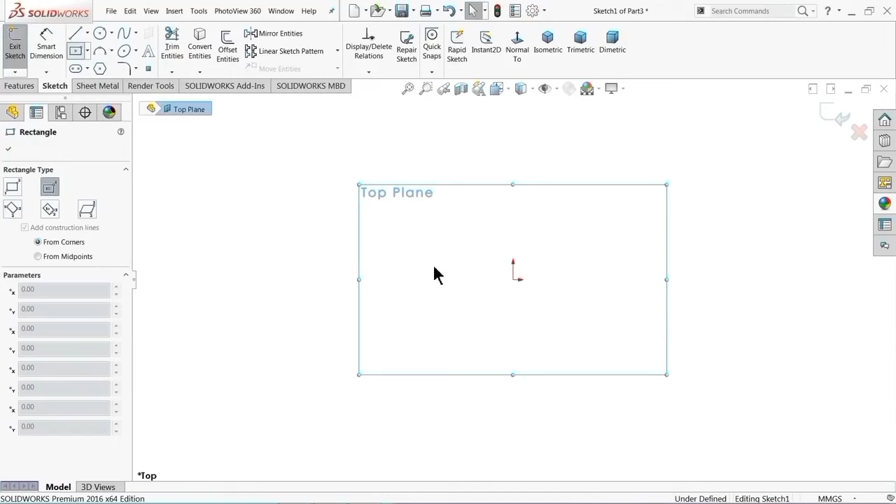Start with the origin point. Right click, select smart dimension.

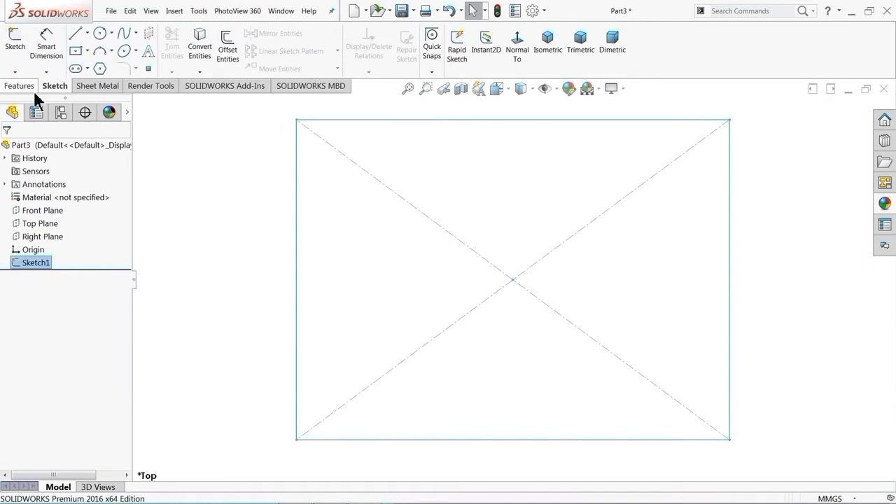Now this upper one is 92 millimeter and this length is 68 millimeter. That's it. Now simply select exit and go to feature and select extruded boss base, and we want to extrude here. Direction 1, keep blind condition 18 millimeter in upward direction. Don't go reverse, let's try upward.

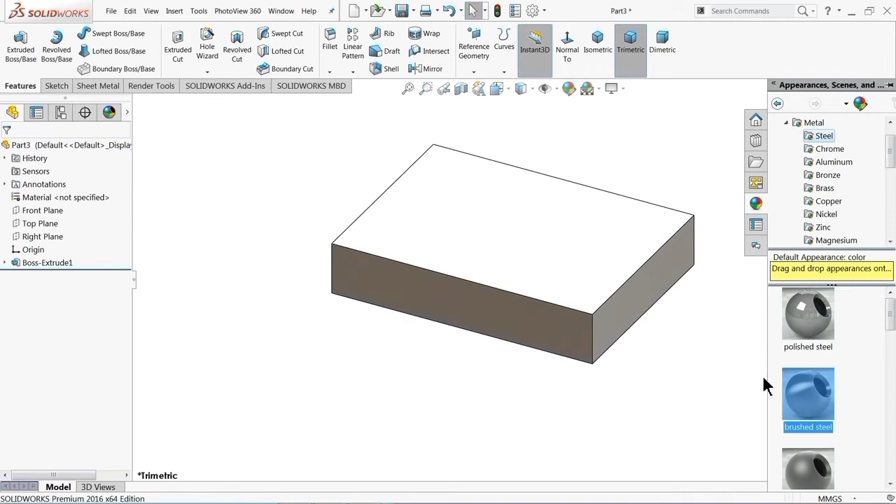Let me select this part and assign some material. I'll choose brushed steel here, polished steel is also available, but let me choose brushed steel.

Select this face, sketch, normal, and here we need to create two holes. Let me select here, two holes, 1 and 2.

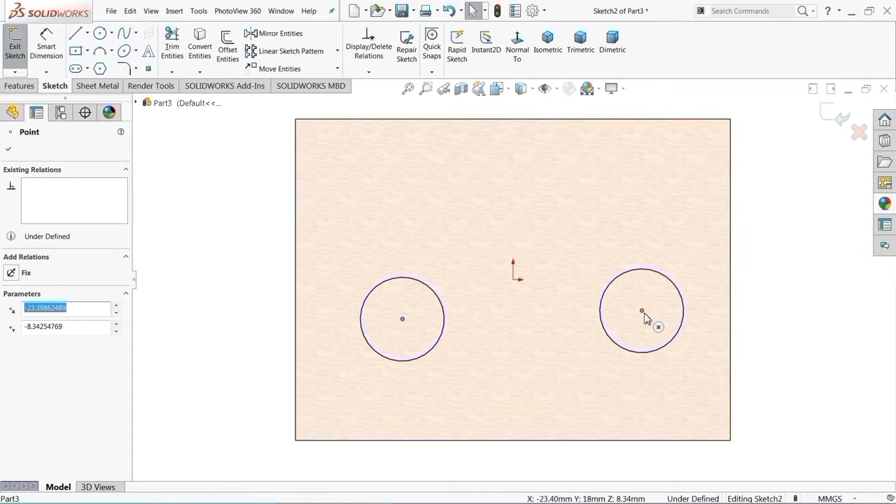Now select both the holes and create a relation. You will see here equal. Now select both circles' center points, horizontal. Let's try to assign dimension.

From here to this point, 20 millimeter, and the distance from bottom edge 28 millimeter, and hole diameter is 16 millimeter.

Okay, let me define this gap also, 20 millimeter. Right click, select, and let me lay down these dimensions.

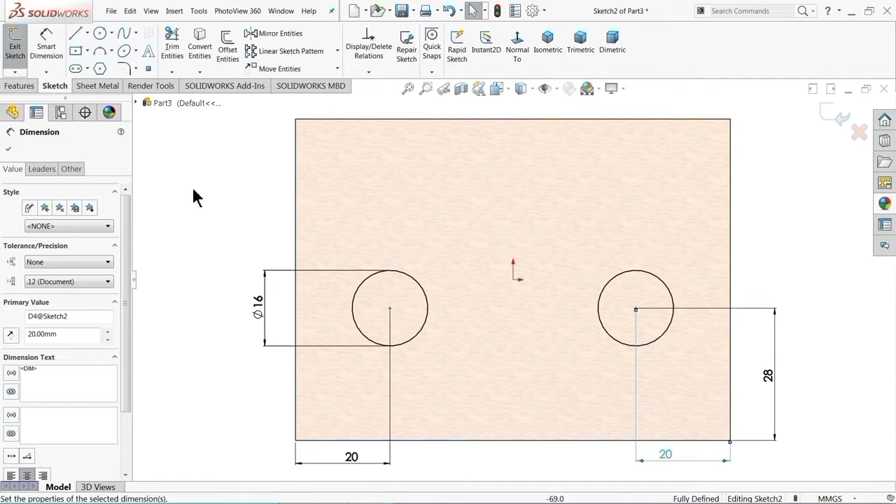Now select exit and go to feature and select extruded cut, isometric view, and we want to cut. Let me select here blind condition, end condition through all.

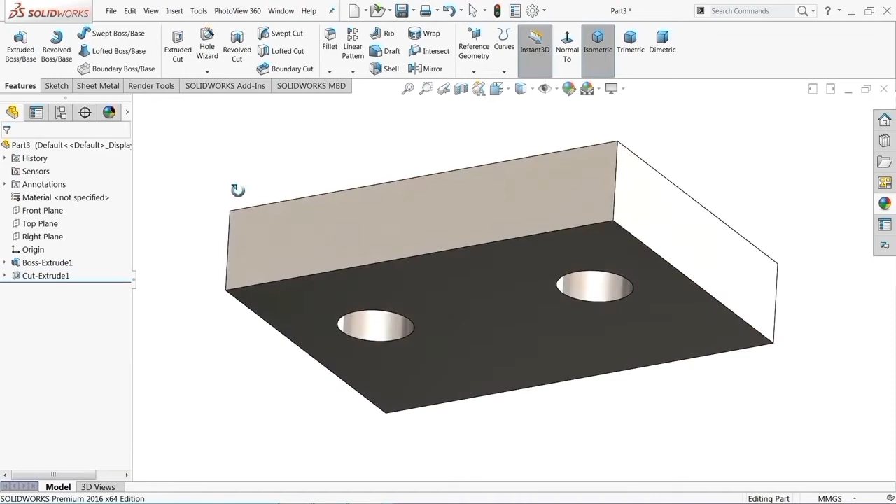Okay, now let's see. Now see, 16 millimeter dia, 20 and 28. This is the hole size.

Now it's time to make this side wall. This side wall is 53 millimeter long. We will make first this bottom, 18 millimeter radius, 12 millimeter thick, and this corner has 6 millimeter radius. That's it. And the total distance is 125 millimeter from one end to center or end of this wall.

And if we minus 125 minus 68, and here radius 57 balance, then if you choose minus plus R6, it will go around 63.

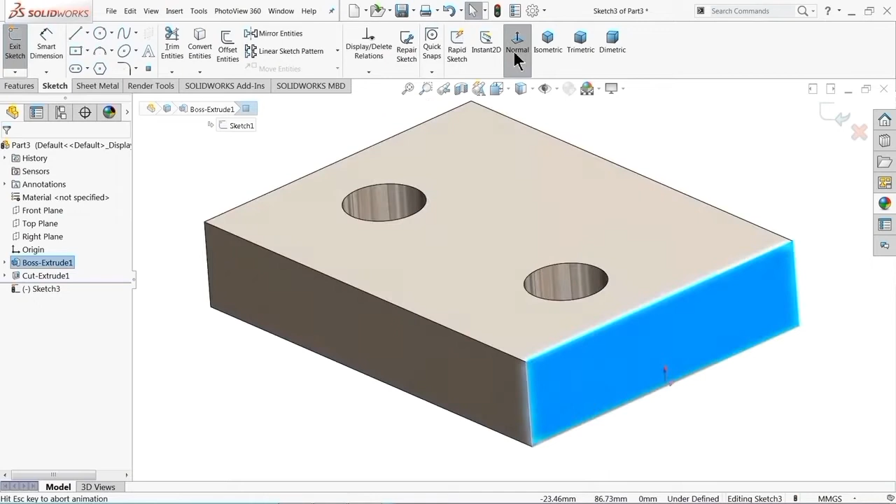I'll select this face, sketch, normal. Now let me start from here. Select the line and start from here.

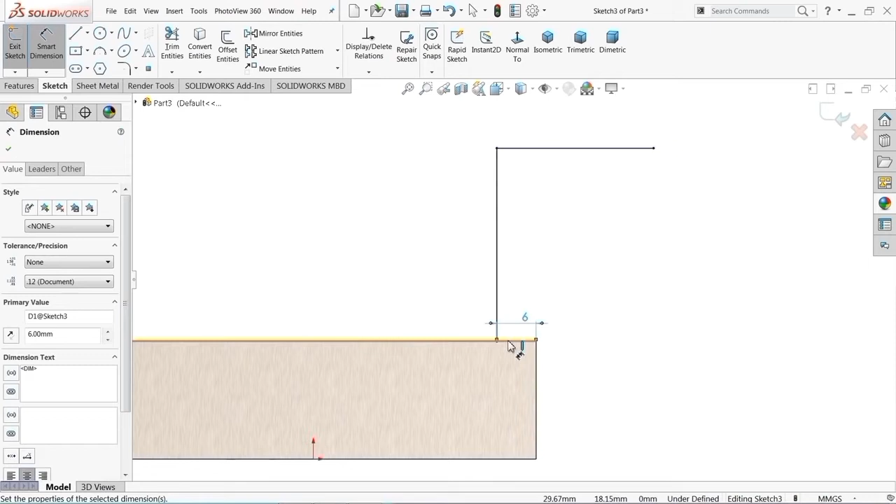Smart dimension. Here we will select the line, 6 millimeter radius, 6 millimeter gap, because here 6 millimeter radius are there, and this distance 53 millimeter, and the upper one keep 63 millimeter.

Let me choose fillet, 18 millimeter, and select this corner.

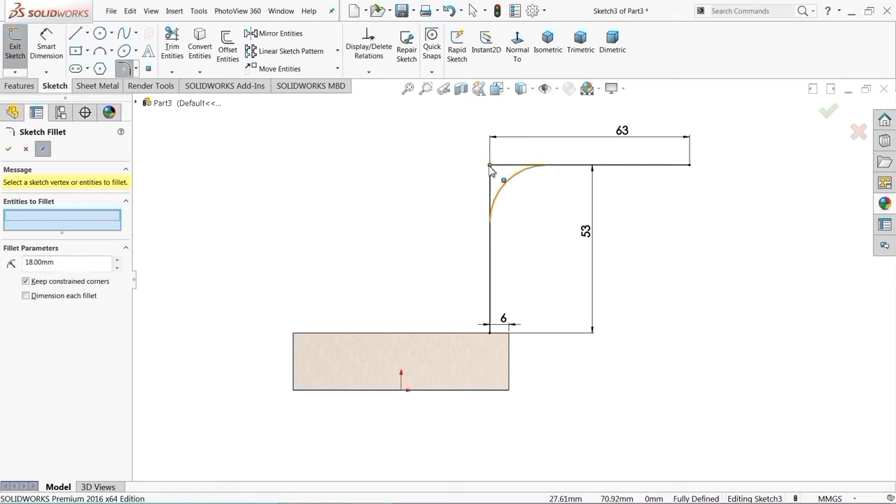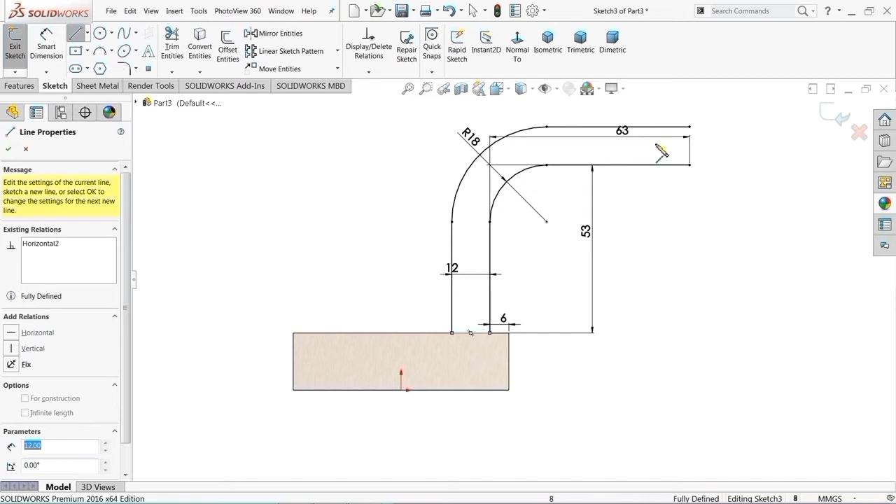Now select here offset entities, keep 12 millimeter and select this one. It's going inside, so select here reverse direction, and check all these boxes, add dimensions and select chain. Okay, select here line and close the geometry from both ends, from here to here and from here to this point. Right click, exit.

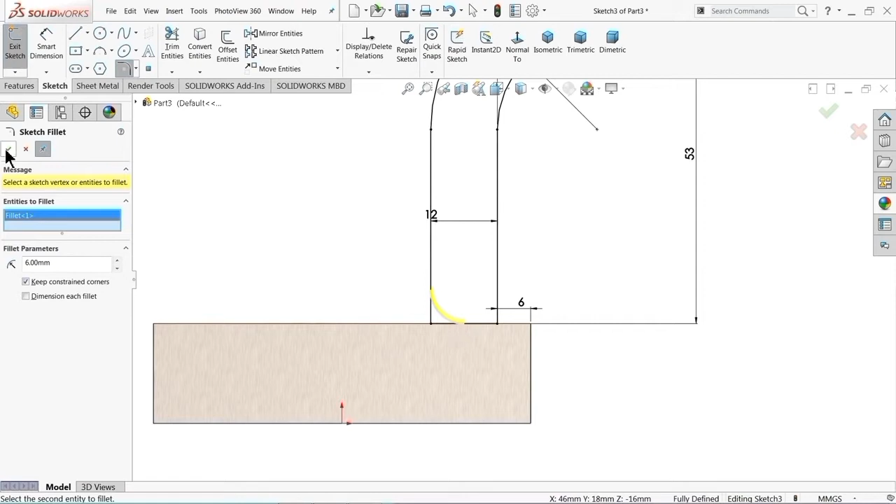Now here we need to make one radius. Select fillet, keep 6 millimeter radius and select this corner. Here we will later define the radius. So this is the fully defined sketch.

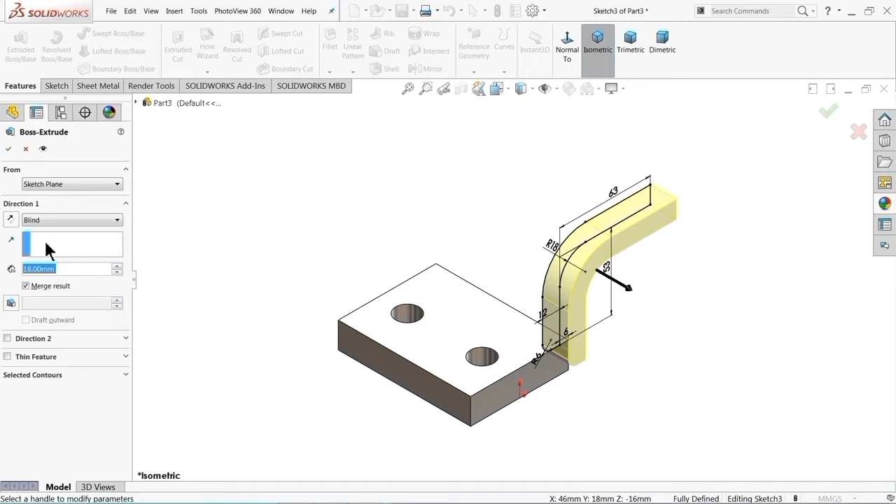Select OK and let me extrude. Select extruded boss base and extrude up to, take reverse. Either you can select through all, or even you can define the thickness, length 92 millimeter. It's up to you. See, either through all or distance.

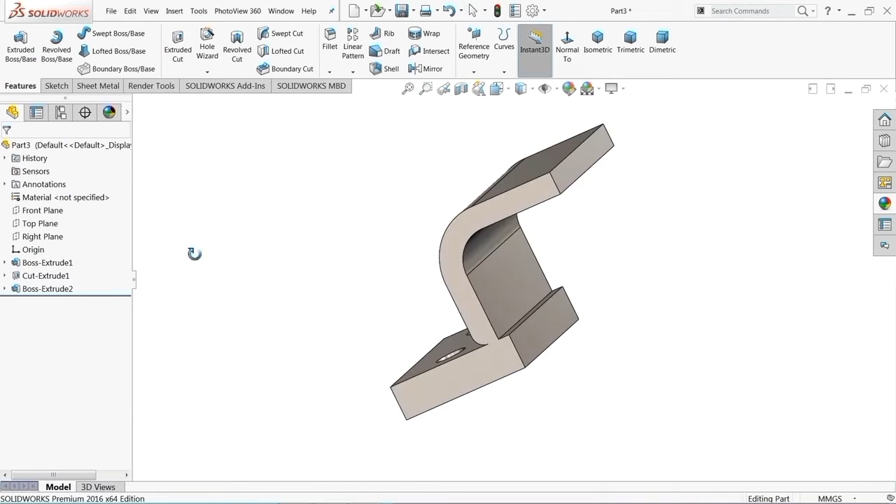Now let me choose here fillet. Keep radius 6 millimeter and select this corner. Now see, it's fully defined radius.

Now this looks similar to the geometry. At the corner you will see R6 at both ends, so this is a little critical. 12 millimeter is fine. Now it's time to create this 80 millimeter outer diameter, and inner 40 millimeter, and the thickness from top to bottom is 55.

So here 12 and bottom shows 6, so 6 plus, if we choose one space, then 18 plus 37. You will understand, let me draw.

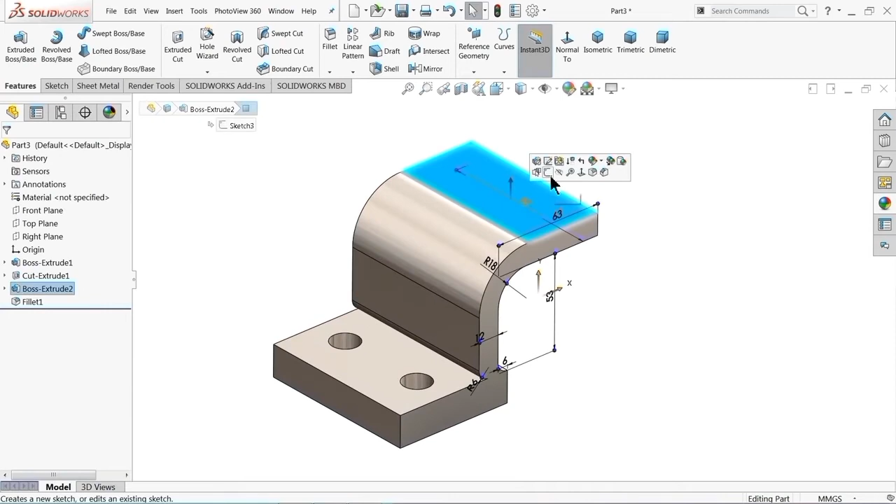Select this face, sketch, normal, circle, and find out here the center point. Now let me define this diameter, 80 millimeter.

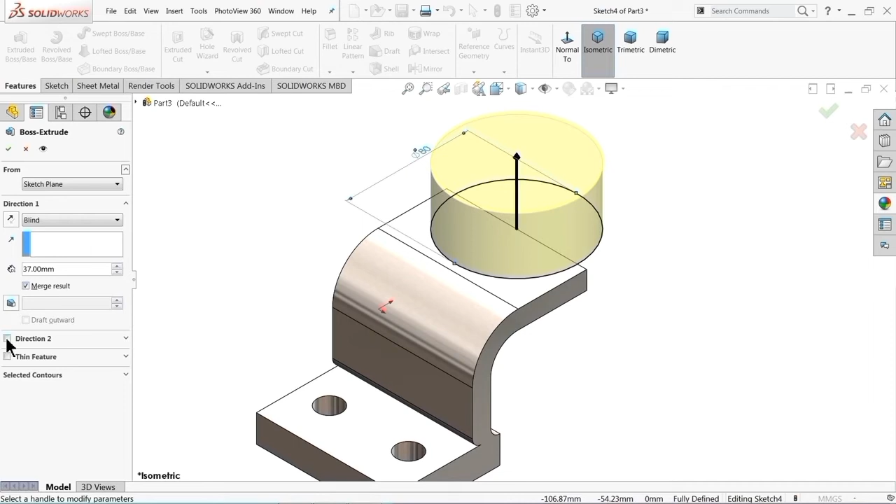Select isometric view. Now it's time to extrude. Extruded boss base. Now in direction 1, we will select 37, because total 55 millimeter length, so 55 minus 37 is 18 millimeter. So choose direction 2, and in direction 2, let me select 18 millimeter only.

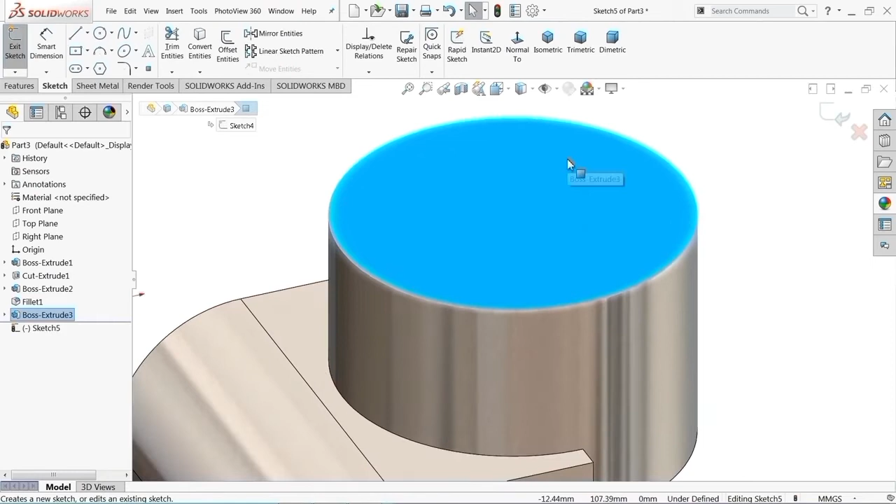Now there is a hole, so let me select the top face, sketch, circle, and just keep your mouse near the circle and you will find a center point. Just click on center point and draw a circle, smart dimension, and this diameter is 40 millimeter. Okay, now simply select exit.

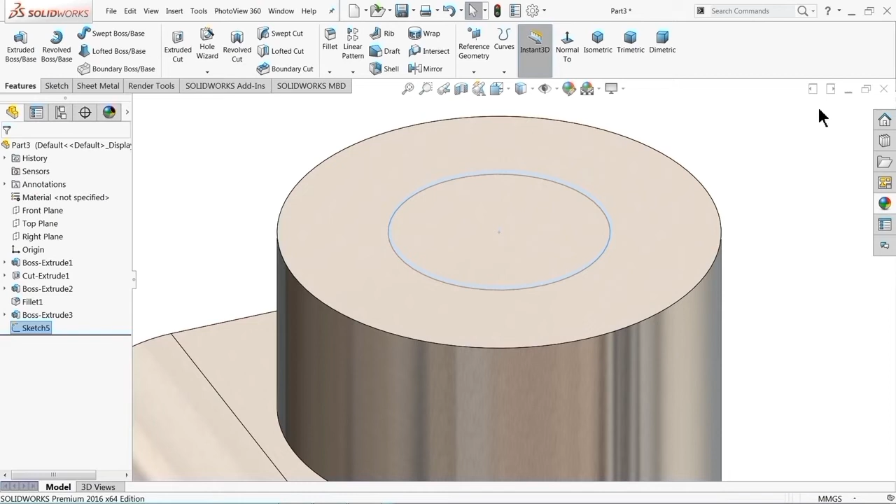Either you can, if you don't have time, no need to select exit every time. Directly you can choose extruded boss and extruded cut command. So I'll choose here extruded cut, and select through all. Through all means up to this body, or even you can define the distance if required.

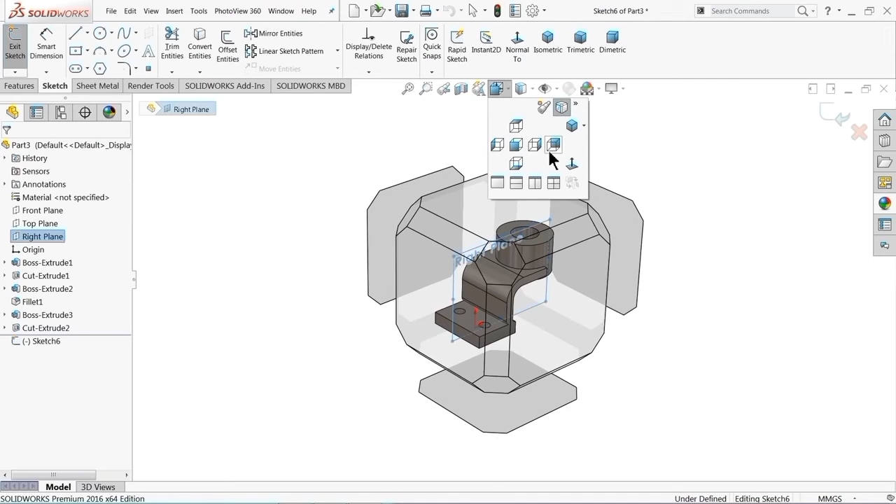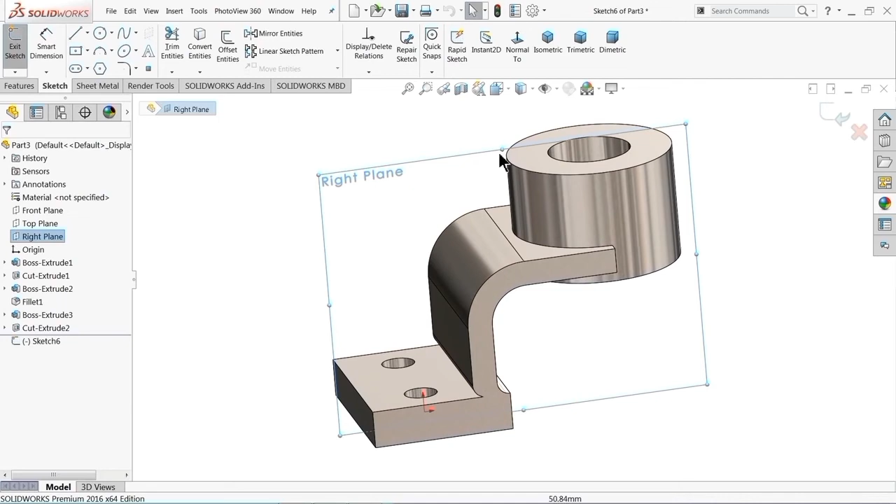Select right plane, sketch, take the normal from here or directly select from here. Select line, start from here, 24, then here, then end with this point. Now select here smart dimension.

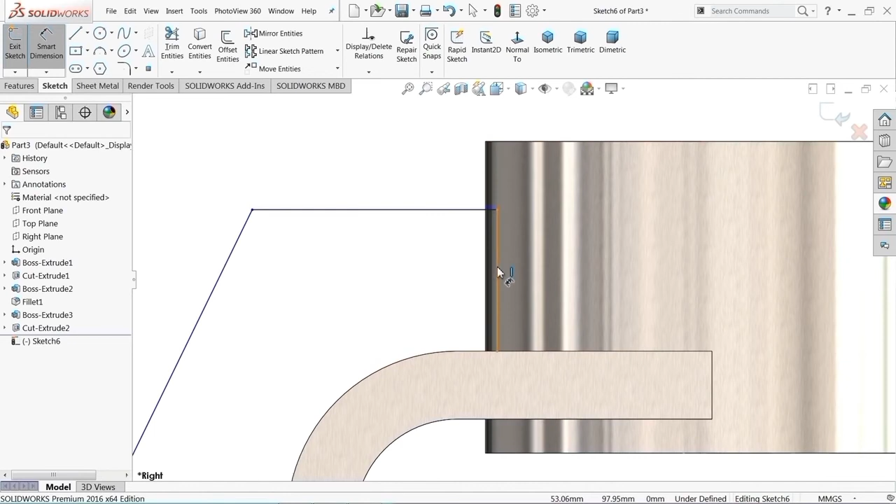First let me define this 24 millimeter, and let me choose the distance from here to outer edge, 1 millimeter.

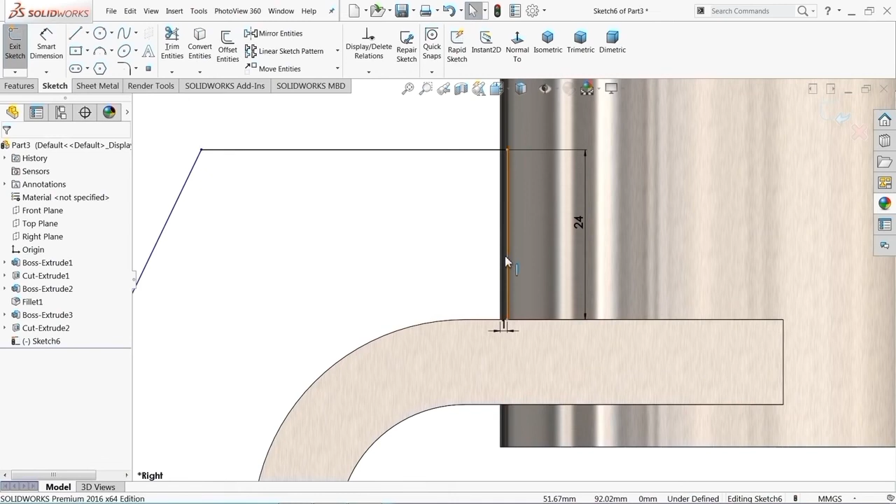And select this line as a construction geometry. We don't need to define this line. Smart dimension, 42 millimeter, the radius.

Now see, this line is created, exit. Now we will try the rib command.

So select here rib. Now see, the rib command is already selected. Keep mid thickness both side, and thickness actually 14 millimeters. See, the arrow is coming upward, so select flip material side, select OK.

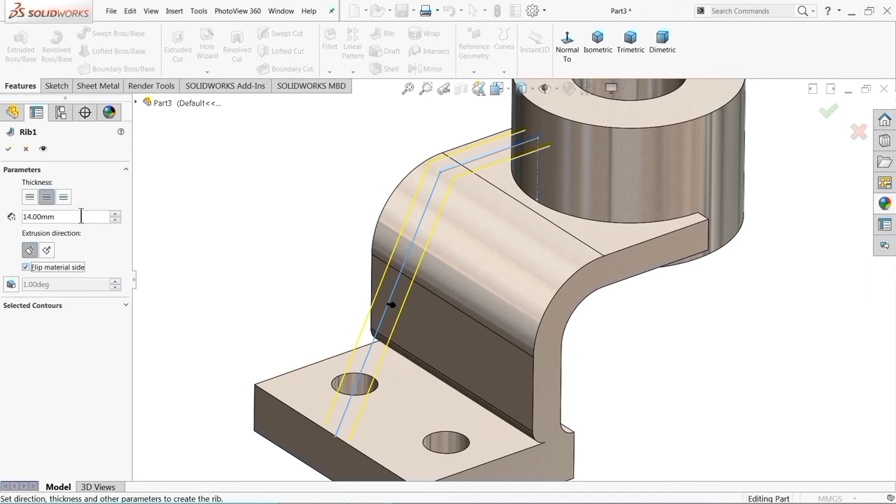Now look, the rib is created. Now here we will define the radius and everything.

Let me choose fillet. First we will define 42 millimeter. So we will select this one as 42 millimeter.

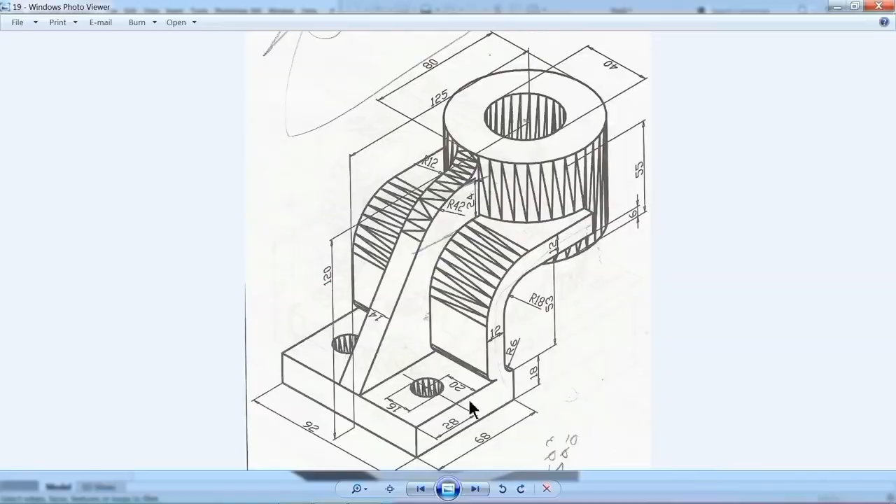And the last one is 12 millimeter. Okay, the last one is 12 millimeter. That's it, okay.